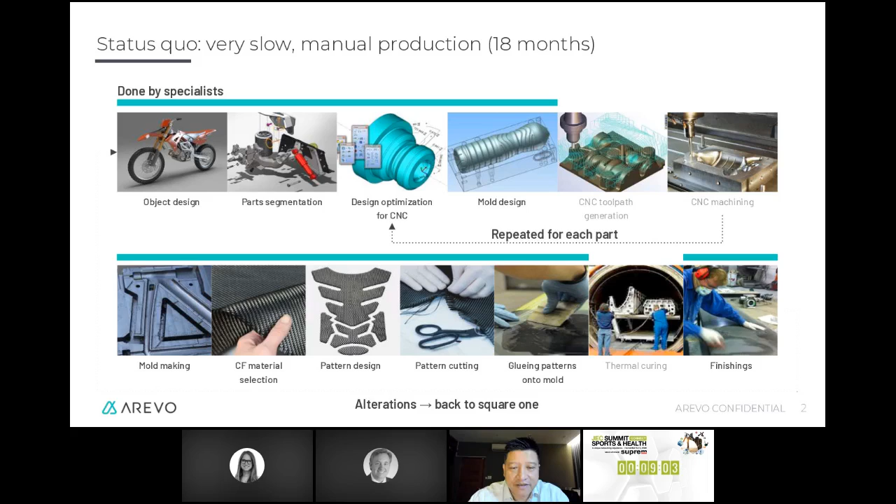We can be done at this point, but double clicking into what we actually do. The status quo for making parts for industries such as bicycles is a long process, 18 months from new product introduction, from design to mold making to actually doing all the steps to use the molds, to curing and whatnot, and then post-processing and finishing. It's a long process, and if you want to change anything, it can be pretty complex.

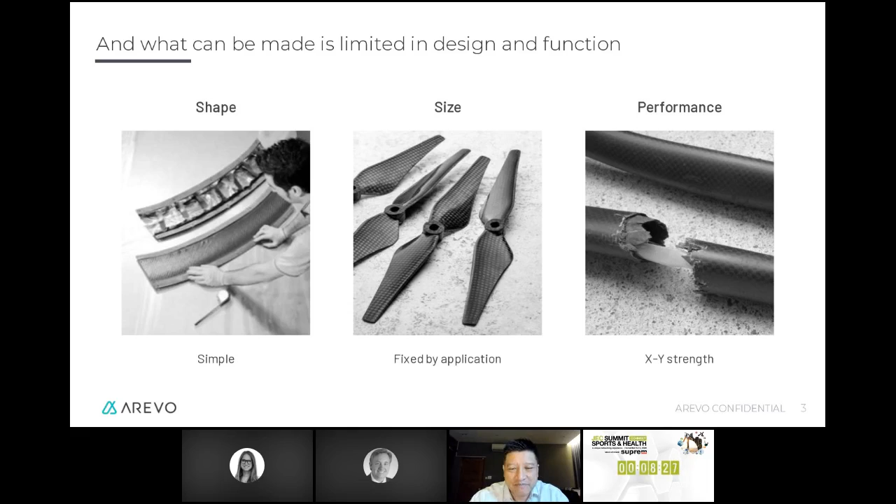All of this, I think everyone here knows. The process ends up producing parts that, in many ways, the shapes are quite simple. You're limited to what you can do with the sheets. The sizes, the shapes, fixed by application. If you want to make rotors one day and then fins the next day, that's another production line, another set of molds and tools. And strength is mostly XY. We're all talking about composites because we want strength to weight ratio, right? So you get that, but it's mostly from a two-dimensional perspective.

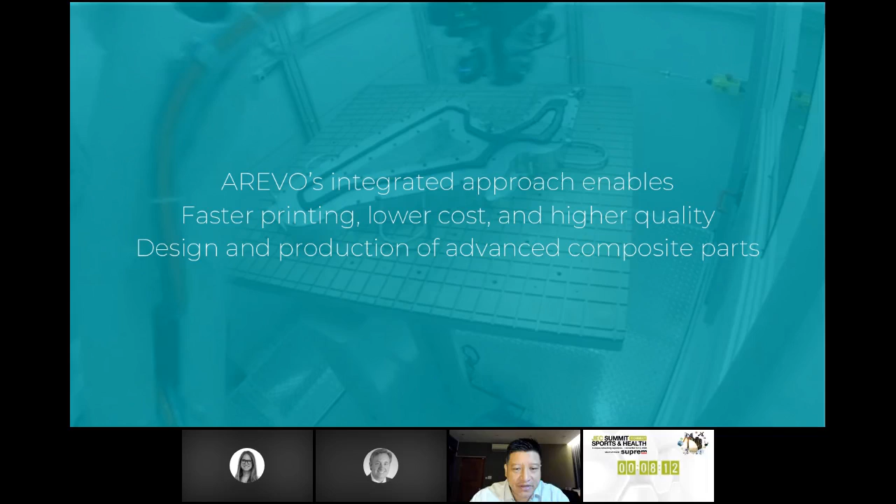Our promise to the market with our technology is faster printing, faster production, lower cost, and higher quality. Have your cake and eat it too. That's what we can do with our technology. So how do we do this?

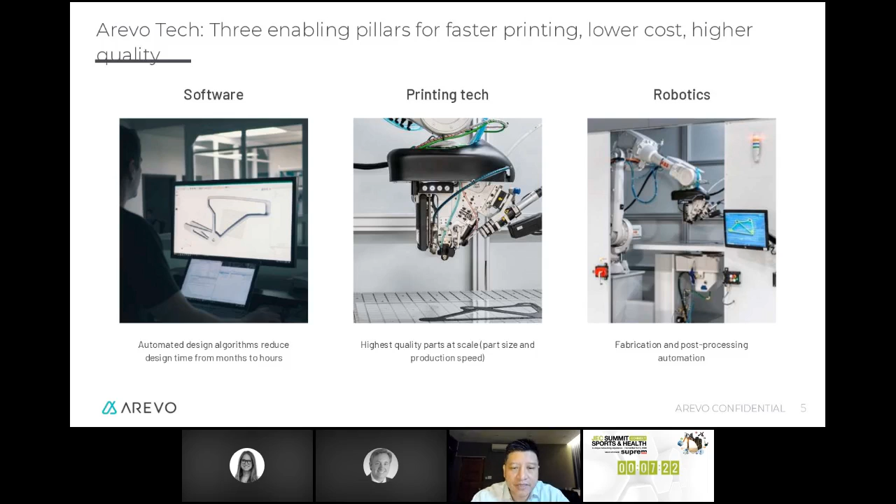There are really three enabling pillars for what we do. It's the software. The software enables us to automatically generate designs that engineers might not think of, that humans might not think of, and really come up with designs that optimize the use of the anisotropic properties of the material. The printing technology, the deposition technology that we have is quite unique. It's directed energy deposition technology that enables a very fast material deposition and essentially no cure time. And the robotics, the control of the system to make this work. We'll see the system at work in just a bit at the end of the talk.

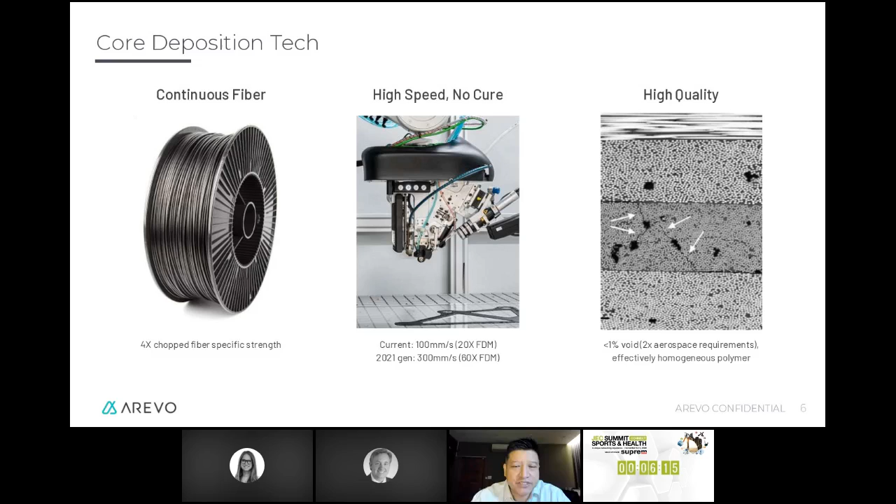We're getting less than 1% void content, and so we were able to meet aerospace requirements. Airbus, they're one of our early investors. They saw what we were able to do, and we were able to make early believers of them. So excited to be able to deliver on quality, which when you look at this under microscopy, it's effectively homogeneous polymer.

The process tech, I think, is really what's enabling us to be able to do what we are demonstrating with our first few products. Open atmosphere, so you don't need a box. I mean, we have a box mainly to protect people from the lasers, for operator protection. But this process can be done in open atmosphere. And unlike additive manufacturing for other materials like metal, for example, the thermal management issues, the thermal stress issues on the structures, we just don't have them, so it's a lot less complexity when it comes to the fabrication steps.

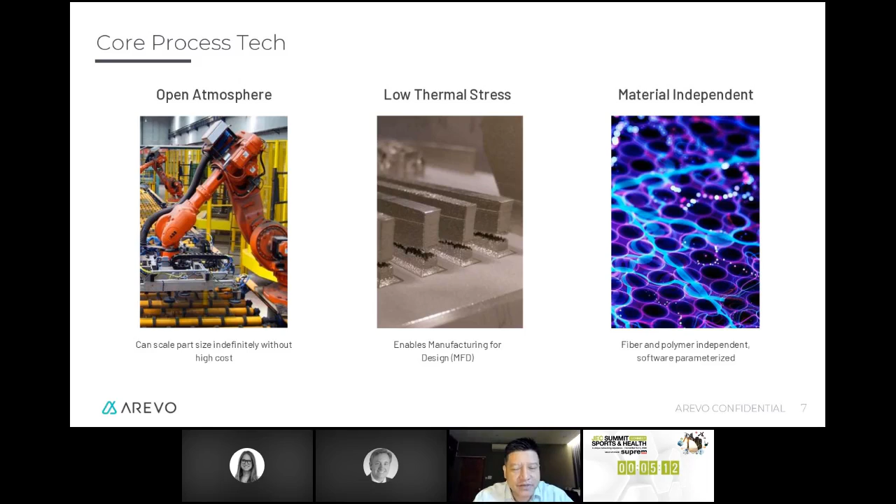And material independent. We started with PEEK, and we've moved to doing nylon. We can do PEKK. There's a number of materials that we can handle. And it's largely software parameterized, so I wouldn't say change on the fly, but we can switch out fairly easily. So what does this all enable us to do?

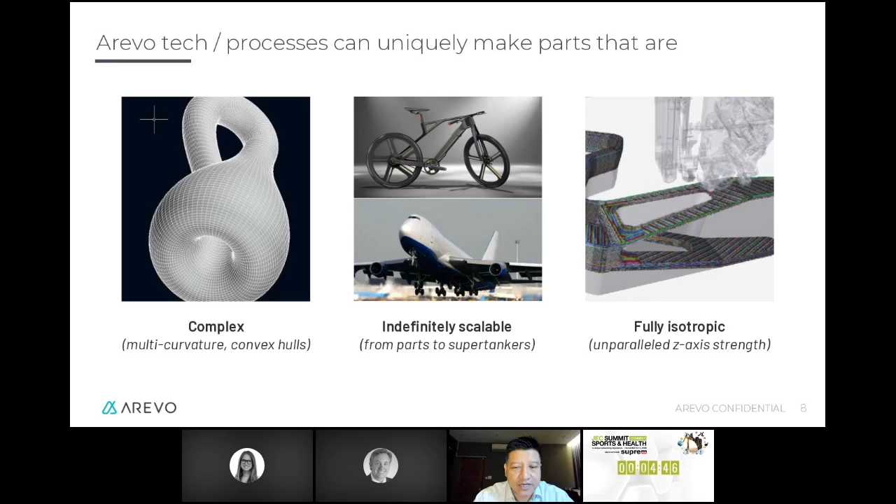We can make complex curves, complex shapes. The size is indefinitely scalable. And one of the best features, it's nearly fully isotropic, so we can get z-axis strength that's pretty unparalleled because we can print off plane. It's not just 2.5D layers.

So to make a point out of all this, we launched the Superstrata, and this is really our first. The crazy idea was to launch a B2C product and to show what we can do. The idea here was to demonstrate our ability to manufacture for design. That is, to design something that really was different, and then be able to fabricate that and actually put it into production.

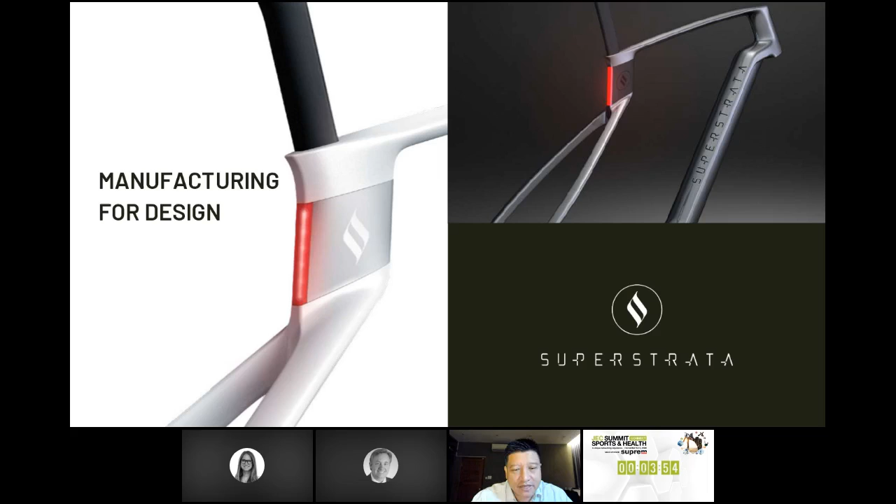So not just make it, but make a lot of it, and make it at an affordable cost. You'll notice here that for this bike, there's no seat tube, so the design's quite different from what's out there. The whole piece is a unibody carbon fiber frame, and one of the most interesting things about it really is that it can be customized.

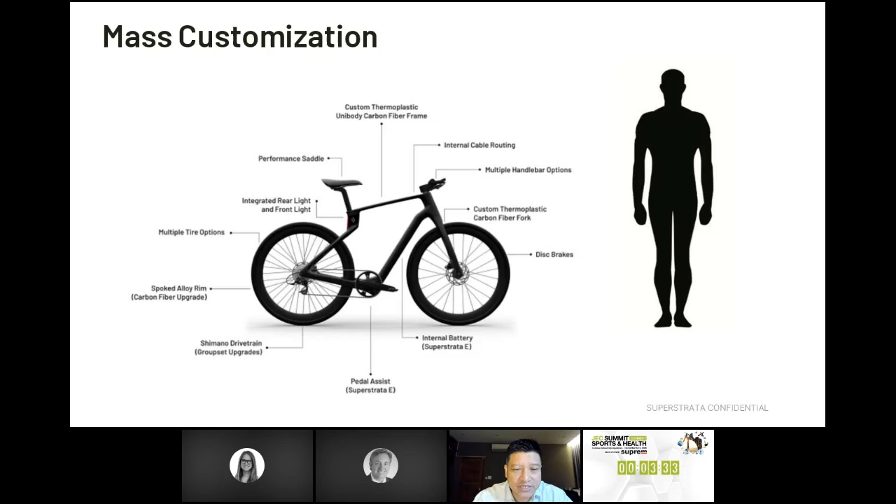So there's a bunch of features that you can customize on the bike, but the best part is the user enters in their physical size, and the frame is actually computed by our algorithms, and each frame is custom printed. The way you buy the bike even is quite different. You actually just go onto our studio, you pick out what you want. There's an e-bike version. The bike and e-bike basically look the same.

We just hollow out the inside and put batteries in it for the e-bike. Pick out your colors, pick out the ride style, and voila, there's your bike. We print it, assemble it, and deliver it. Pretty straightforward, really changing the way you buy bikes.

We decided to launch this online on a crowdfunding platform just to see how it'd do. It did pretty well. We were expecting a few million dollars this year. We hit our 3 million mark within 13 days. And so this campaign really just took off, and we had no idea.

We've just been blown away at the consumer interest in this product. Part of it is the tailwind that we're experiencing in this COVID world. A lot of people want to buy bikes, but people really seem to resonate with the Superstrata concept, the design, and what they're getting for it, a customized unibody carbon fiber bike.

So this is really our playbook: we're demonstrating B2C applications in order to generate inbound B2B interest. So after we launched this, we just had a spectacular amount of inbound interest. Some folks actually thought we're a bike company, which is taking things quite literally, and that's okay.

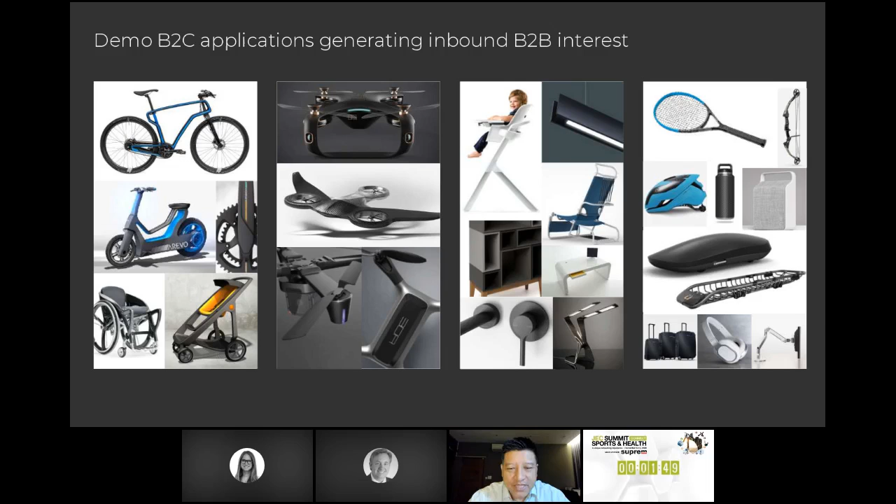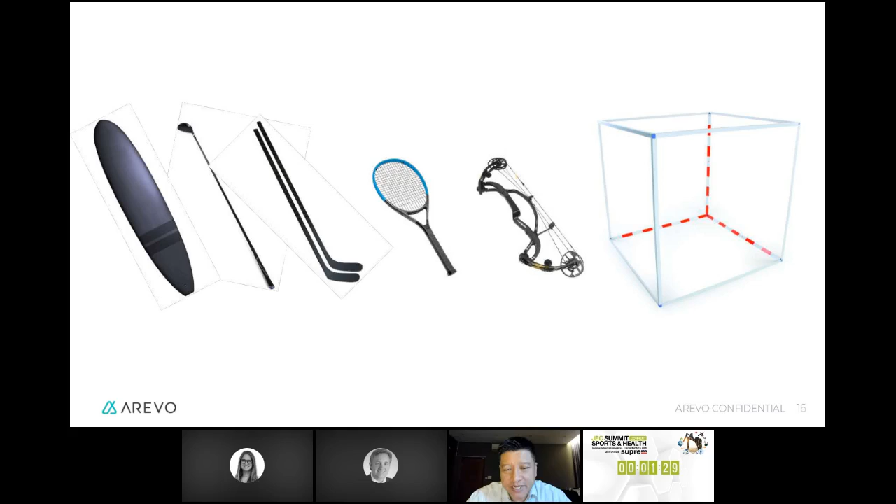And so these are examples of some of the things that we've printed in the company. We've printed golf clubs, hockey sticks, a tennis racket. We've printed a number of those. A bow as well. But basically anything within a 1 cubic meter build volume, that's what we can do.

And so that's pretty much it for my presentation. This is actually something we printed. The entire frame here, and the wheels, but basically everything on this scooter, we actually printed it.

We shipped it to France for the JEC, I think, and then we had to ship it back because the event got canceled. But everything here except for the tires, the brake cables, the smartphone, the seats, and the LEDs, everything else is carbon fiber: the wheels, the frame, the fork. We had a lot of fun with this.

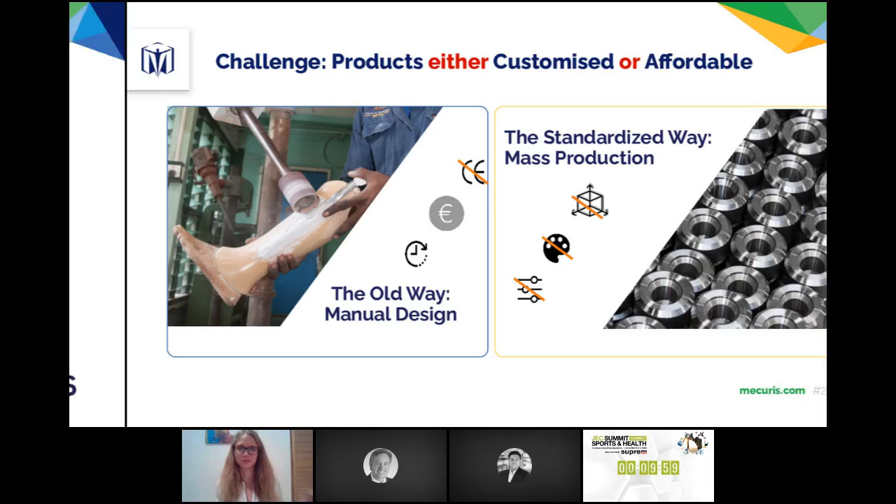I want to open with the challenge we are facing in the O&P industry. There are two big streams. One is the old way, with a lot of manual design and handcraft, even today based on rubber or wood. But this is very time consuming, and there are no quality standards, no CE marks possible for this medical product.

On the contrary, you have mass production, with standard production lines incorporating a lot of metal or composite materials. But it's hard to be super individual for the patient, because you have prefabricated products you choose from a catalog that cannot be individualized to the patient.

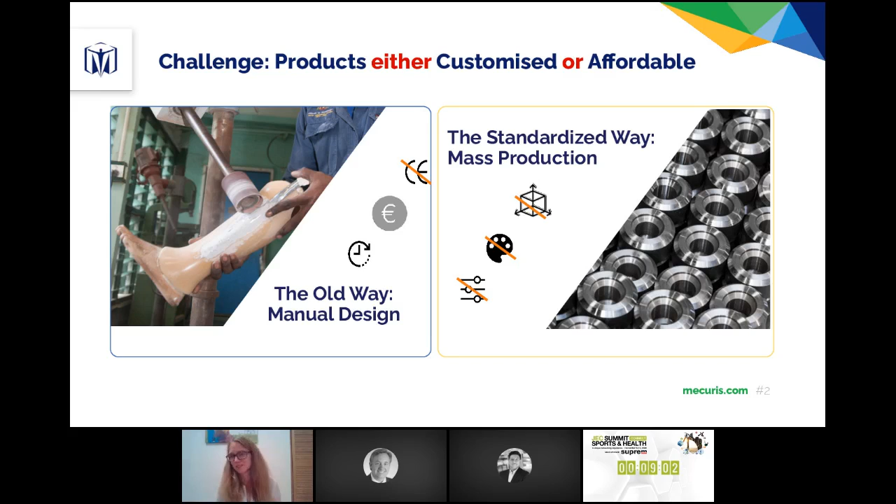Just as we heard earlier, our way to go here is mass customization. I want to present the process that we want to build up at Mecuris.

For us, it's super important to highlight that we don't want to replace a medical professional. In the beginning of this process, it's still a medical professional at the point of care for the patient. But instead of taking patient data and going to the workshop to manually manufacture a medical device, this professional can take digital data like a 3D scan and upload it to the Mecuris platform.

On this platform, the 3D scan can still be modified. You can do post corrections that would be really painful for the patient on the digital model, and you can also design the medical device based on this digital model of the patient.

So now we have a nice 3D design of the medical aid, but we still need to manufacture it. Here we also rely on additive manufacturing that happens externally.

As we just heard from Sonny, this can happen in regional hubs. It doesn't need to be manufactured in just one place, but can happen all around the world, as long as it's a certified production line, because we are still in the medical industry here.

In the end, this product will be shipped to the patient or to the medical professional fitting the patient. The product could still be post-processed, there can be an assembly happening, and then the product goes as a finished one back to the patient.

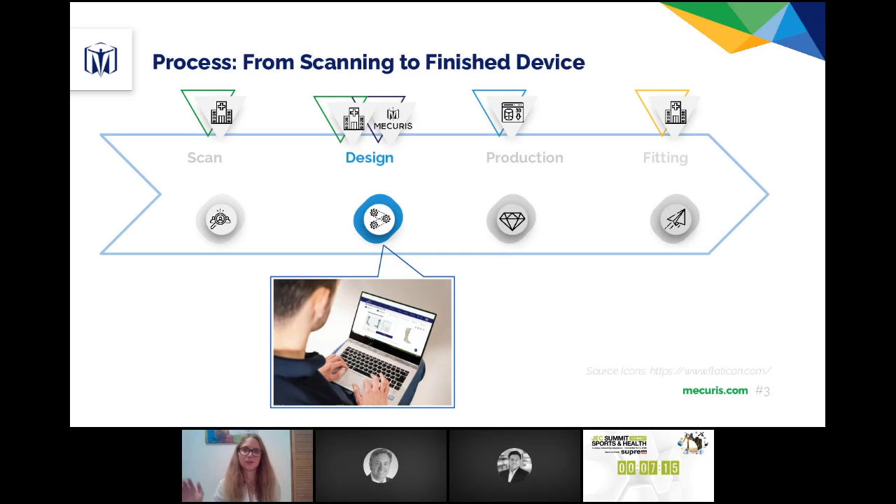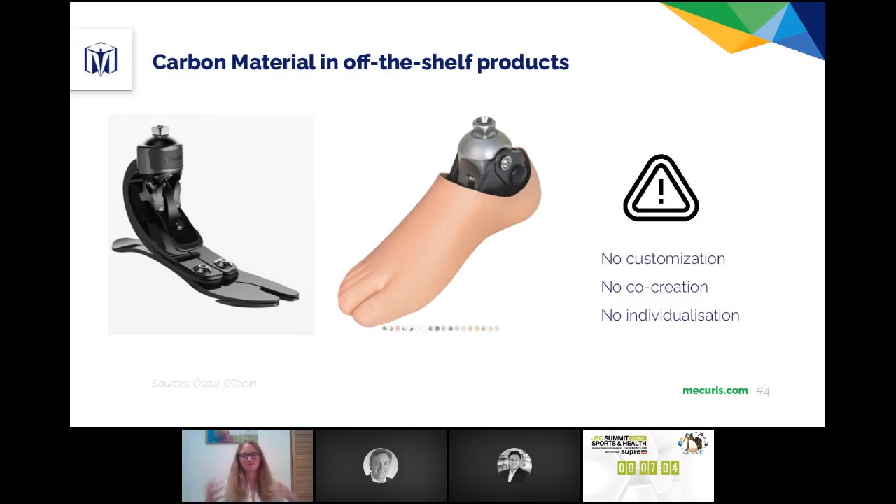You might wonder how carbon material plays a role here. Our view is that carbon material from off-the-shelf products is very important, with high performance, but there are also disadvantages. It's hard to fully customize a carbon product from a fixed production line, and hard to involve the patient because you don't have many possibilities for different designs in an automated production.

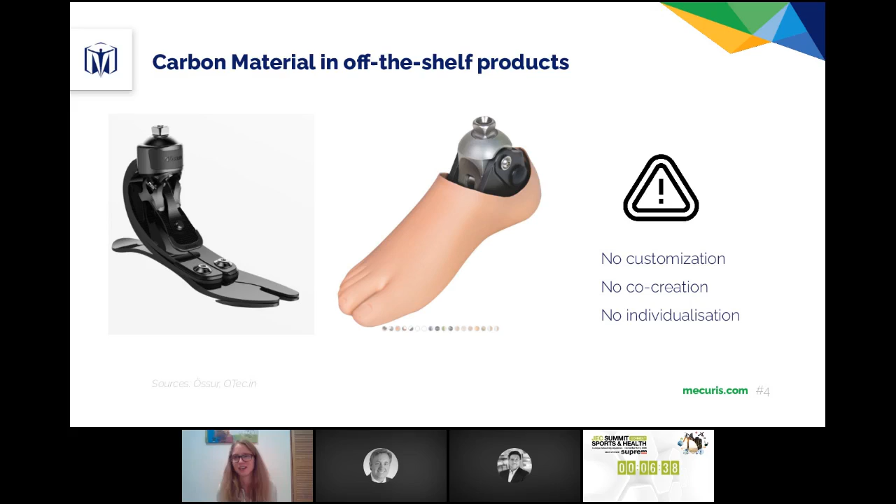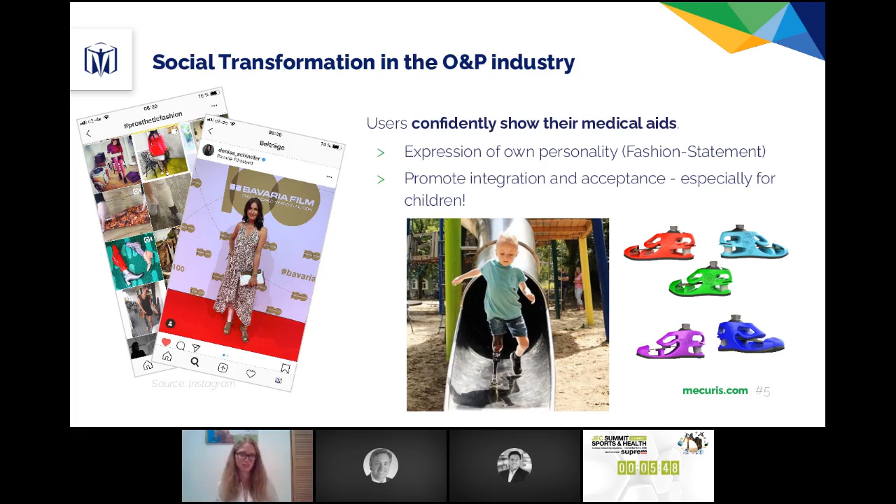On the other hand, we also focus on children. It's important to mention that the acceptance for a medical aid and the willingness to learn how to use it is often as important as the performance of the product. We really want to make children feel like the coolest kid in kindergarten, with their fully individualized product.

So the solution to all of that could be not forgetting about the high performance carbon material, but combining it with additive manufacturing. And this is our way to go.

As you can see here, this is a prosthetic foot. We have the main body, which is 3D printed in polymer, and we can have the patient deciding on the color. We can have different patterns - we even had a tattoo artist print a random design of his into the foot. On the other hand, we have a really nice anatomical shape that is not only based on a rubber cosmetic shell, but really the main body.

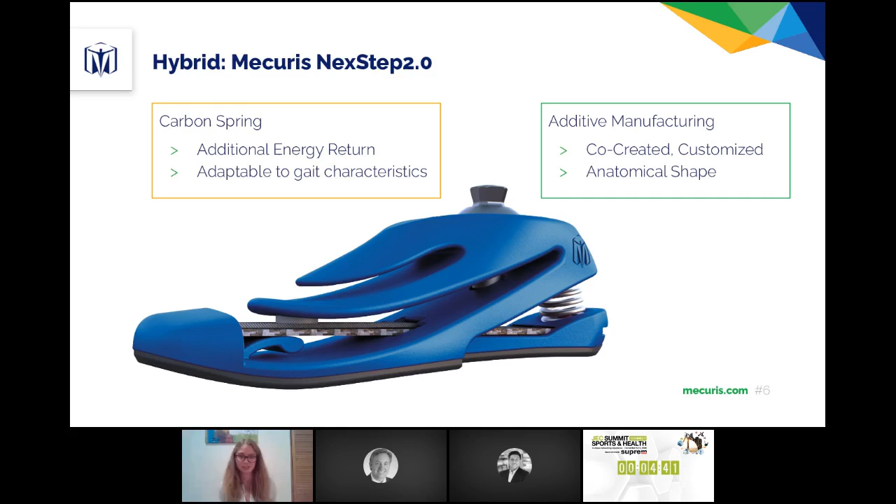Combined with it, to give energy return and really support the gait characteristics, we still incorporate carbon blades. So the patient would walk, the heel strikes the ground, you store energy and release it at the end of the gait cycle, which we know already from other prosthetic products. On top of that, by having different stiffness levels of the carbon blade, you can also adapt again to the patient's gait characteristics. For that, I want to show you a small video.

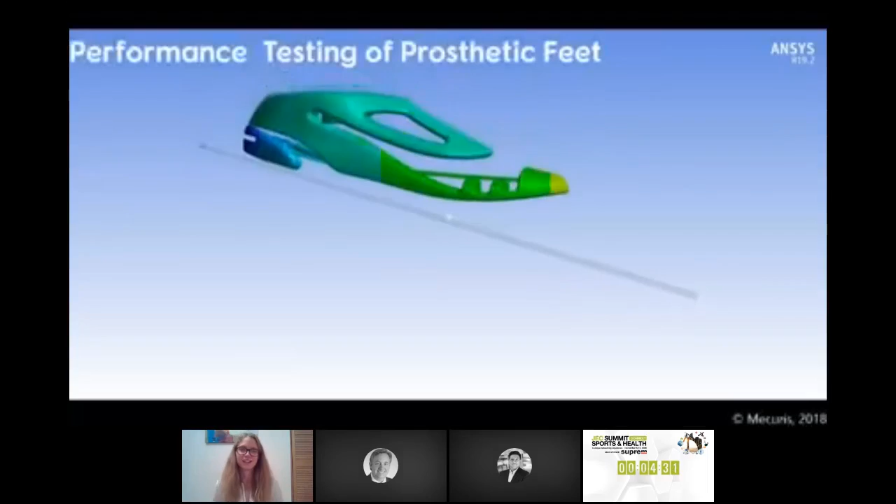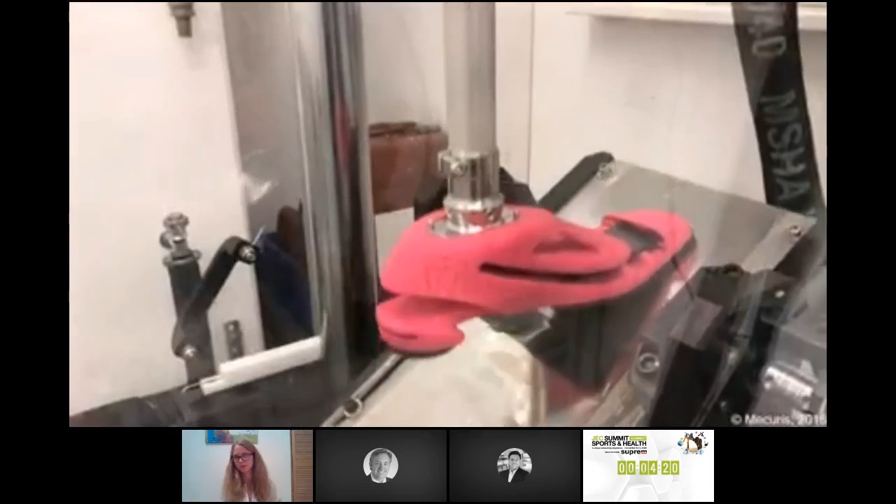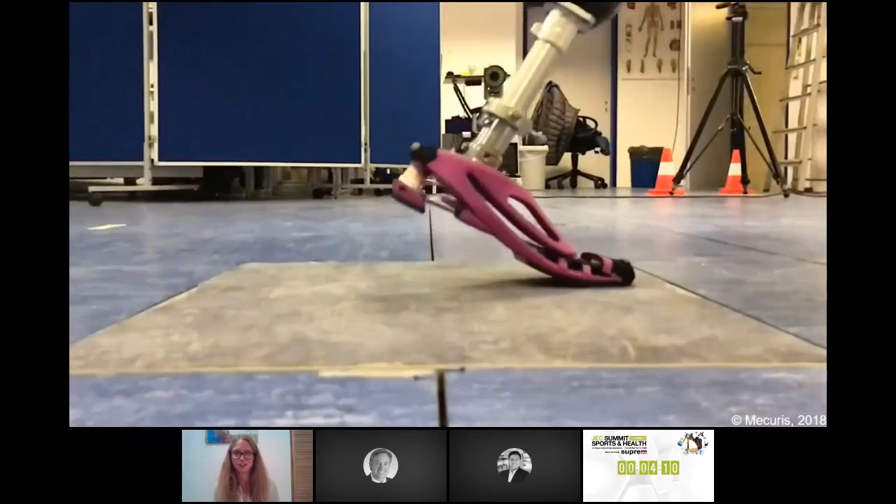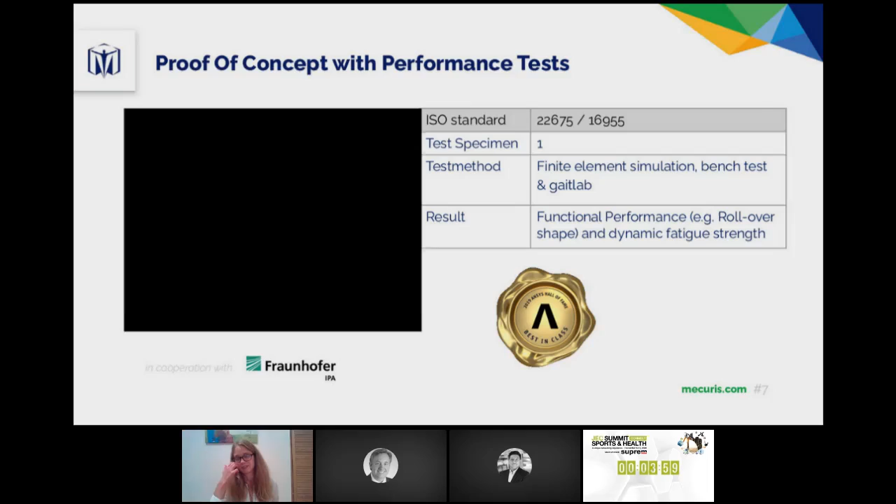You can see here we are working also a lot with FE simulations, and we are trying to verify and validate that our products with this new material are also complying with other products that you actually know from the market already. And even with patient feedback from the Gait Lab, we got nice feedback and nice rollover curves that are very similar to products on the market, or even more adaptable to the individual gait characteristics of the patient. This was also, like Dale mentioned earlier, the prize that we won for the ANSYS Hall of Fame. With the FE simulation we are using, our possibility to test a lot of designs that we can have with additive manufacturing is nice.

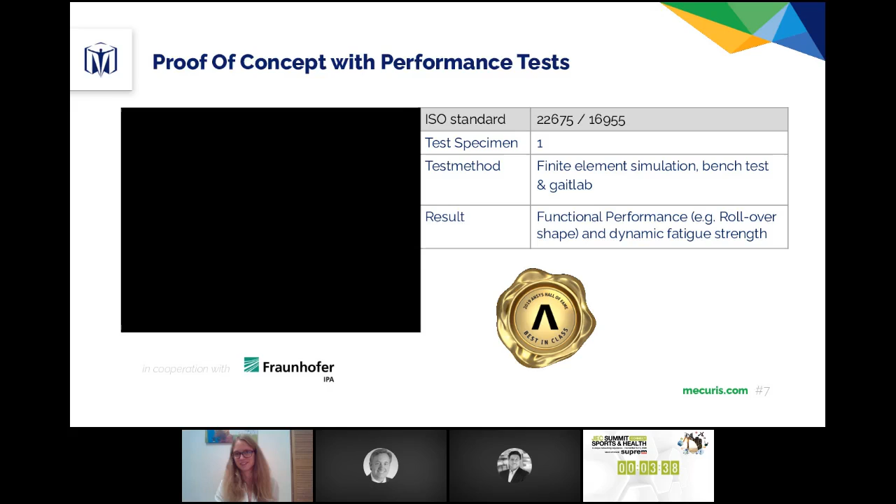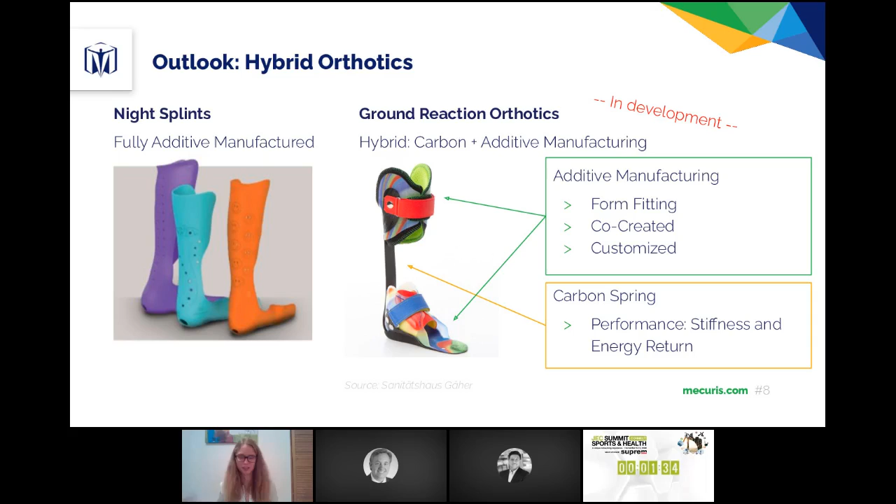On the other hand, you have again the co-creation factor with the patient that can individualize the design, customizing it with different velcro stripes, for example, or different kinds of attachments to the leg. We see here always this nice combination between the carbon material and the polymer-based additive manufacturing to have hybrid solutions that are really customized to the patient in design and performance, but still have the support of the carbon material for the performance and stiffness needed.

And with this, I want to close my presentation, and I'm happy to answer a lot of questions.

Thank you, Franziska. A very interesting presentation, very interesting company. I was on your website, and obviously people seem to have a lot of fun. Very cleverly designed website, and looks like a fun group, young group. And if I recall, you have somewhere around 30 employees.

Is that right? That's correct, yeah, somewhere around 30. Are they all in the Munich area, or located elsewhere on the globe? At the moment with the COVID situation, I guess not everyone is in Munich, but our office is only based in Munich.

Okay, alright. A couple questions - one is, who has the responsibility for the product? I think the question with the machine provider, but is that Mecuris, or is it the medical professional at the end, for the performance and any liability?

So that's a kind of tricky question because, of course, we are here in the medical market, and it depends a bit on the product. So the prosthetic foot that I showed you, we deliver it as a finished product.

So we are the manufacturer of this medical product, so we also have the responsibility on it. But if you look in the orthotic area, the 3D printed parts are only part of the assembly of the whole medical device. And at this point, the medical professional is the actual manufacturer of the finished product. So it kind of shifts the regulatory background.